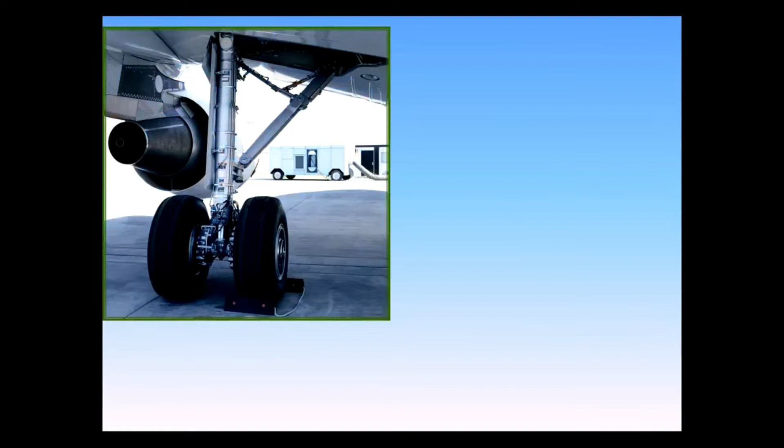The A320 is equipped with dual-wheel main gear which retract inboard, and a dual-wheel nose gear which retracts forward.

The wheels of the main landing gear are equipped with carbon brakes for efficient braking even at high temperature, an anti-skid system, and an automatic braking system. The nose gear is equipped with nose wheel steering.

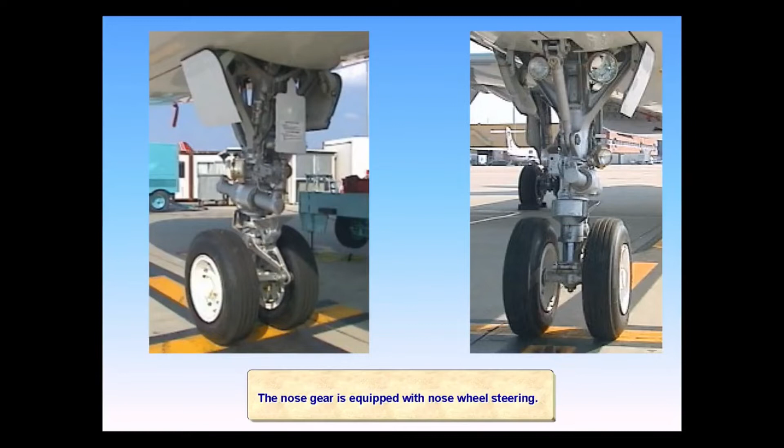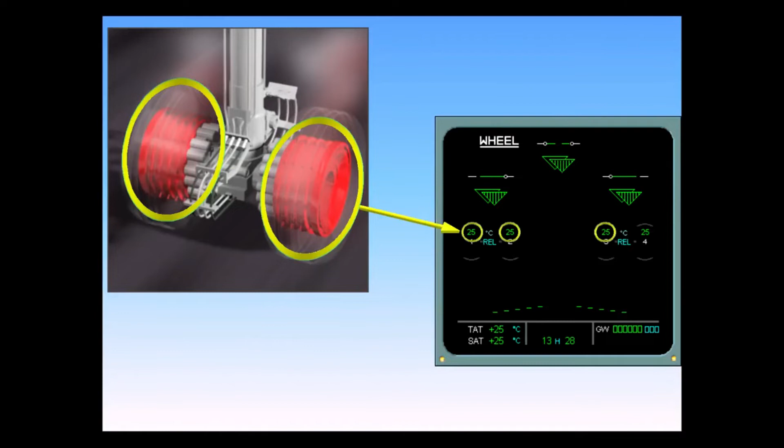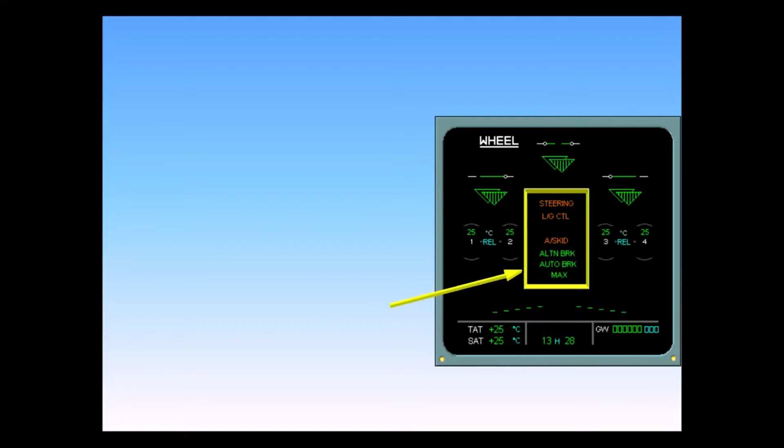The ECAM wheel page displays indications for the main landing gear, nose landing gear, landing gear doors, and brake temperature. In the center of the ECAM wheel page, green and amber messages can be displayed to provide normal and abnormal indications.

Since the wheel page is displayed during landing, spoiler position is also displayed at the bottom of the page for quick reference.

Let's go to the cockpit to locate the controls and indicators for the landing gear, brakes, and steering. The landing gear selector lever is located on the center instrument panel.

Just above the landing gear lever is located a panel which contains switches and indicators for the landing gear, the auto brake, and the anti-skid and nose wheel steering.

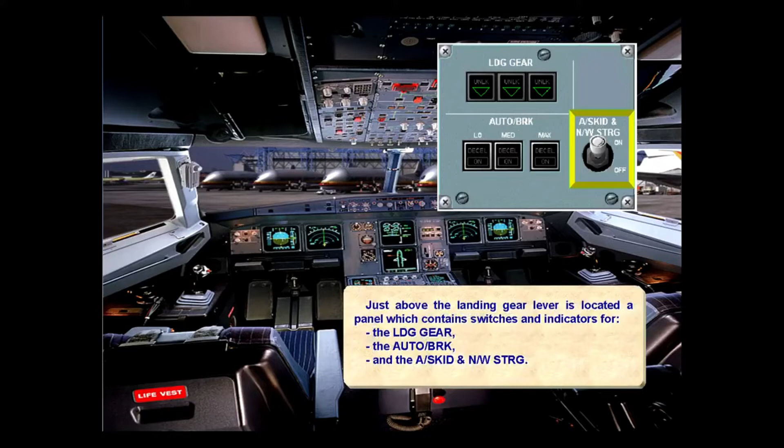Up, down, and unlock indications on the gear panel are associated with position indicators on the wheel page.

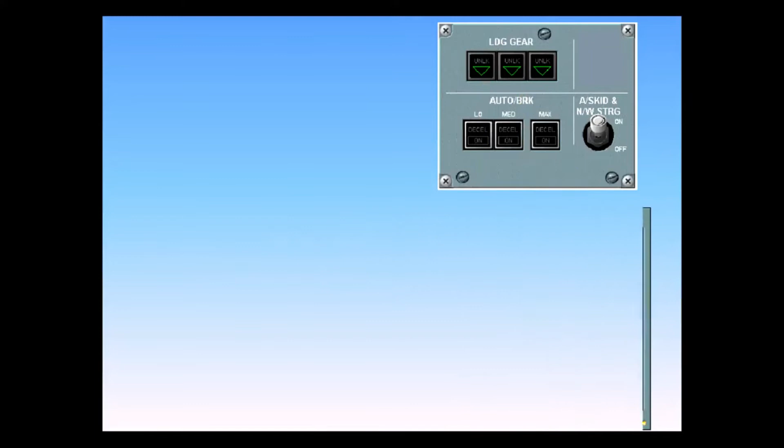When auto brakes are used, selection of low, medium, or max is made using these push-button switches.

This switch controls both the anti-skid and the nose wheel steering through the brake and steering control unit, the BSCU. Left in the on position for all normal operations, it is switched off only in case of specific malfunctions.

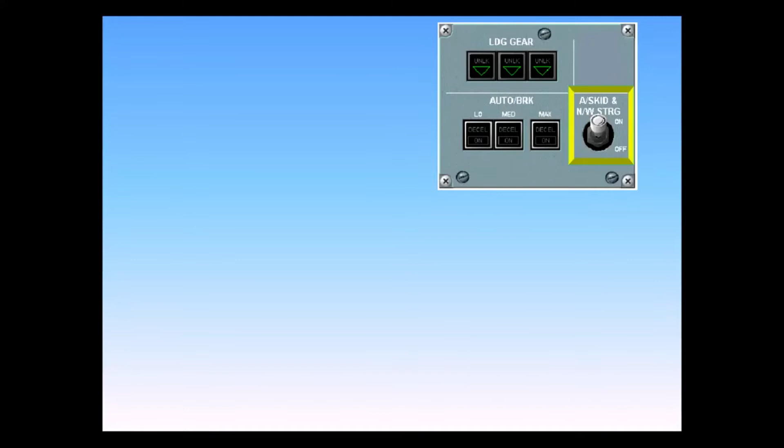The landing gear gravity extension handle is located on the center pedestal.

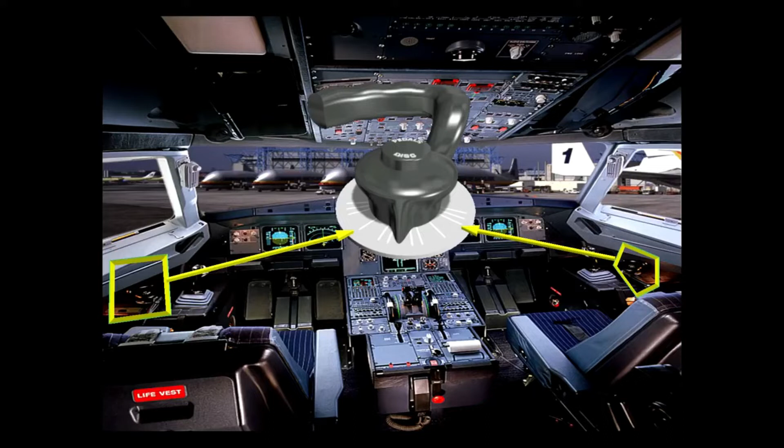The steering hand wheels are located on each side of the cockpit, so either pilot can taxi the aircraft. The rudder pedals can also be used to steer the aircraft. Note, United Airlines policy states that only the captain may taxi the aircraft using the hand wheel.

During taxi, either steering hand wheel can be used to control the direction of the aircraft. The steering hand wheel provides 75 degrees of nose wheel deflection, left or right. Signals from each hand wheel are summed up. If two hand wheels are moved in the same direction, the nose wheel deflection will be equivalent to the sum of the hand wheel commands.

During taxi, the flight controls must be checked. To check the rudder pedal, the disconnect switch must be held down. This button disconnects the nose wheel steering from the rudder so that full deflection of the rudder pedals can be checked against the indications on the ECAM flight controls page.

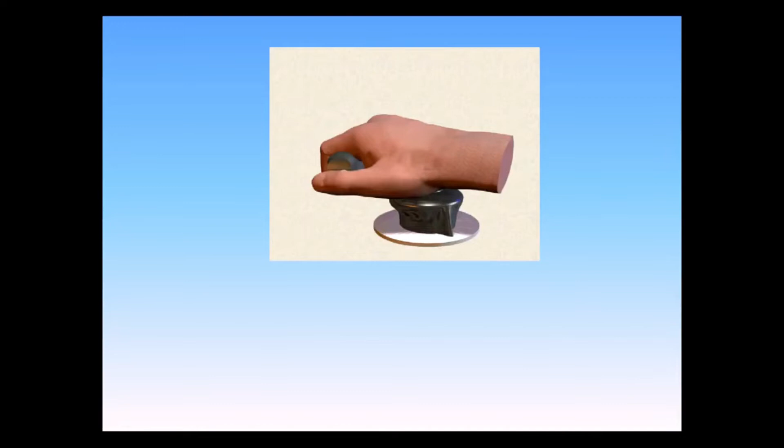During takeoff, the aircraft direction is controlled exclusively using the rudder pedals. The rudder pedals provide up to 6 degrees of right and left deflection at low speed. As the speed increases, this deflection angle decreases progressively until 130 knots, when directional control is 0% nose wheel and 100% rudder.

The rudder pedals are located on each side of the center pedestal. Manual braking is provided using the top of the rudder pedals. The parking brake handle is located on the center pedestal.

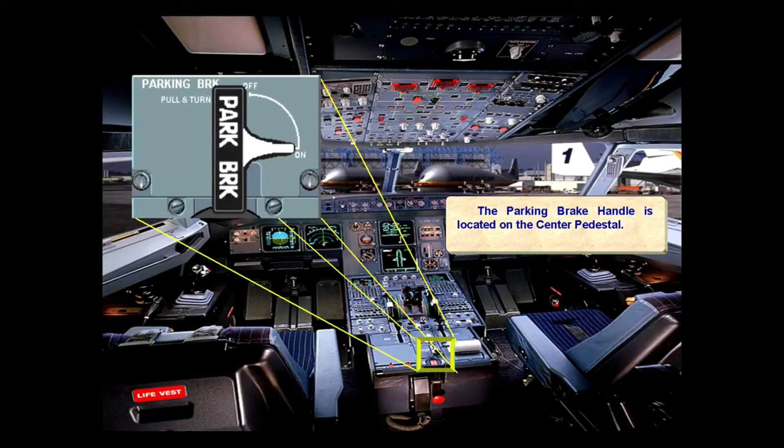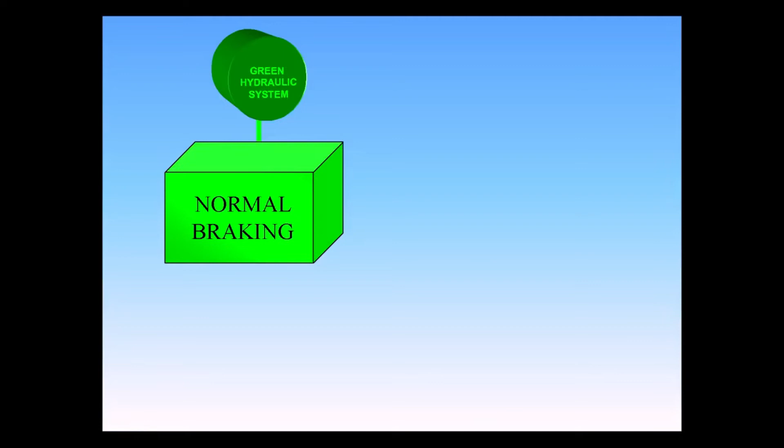The A319-320 provides two braking modes: normal braking, brake by wire; and alternate braking, conventional low-pressure hydraulic signal. Normal braking, which is powered by the green hydraulic system, utilizes electrical signals which are sent to the BSCU, Brake Steering Control Unit. The normal braking provides auto brakes, manual brakes, and anti-skid.

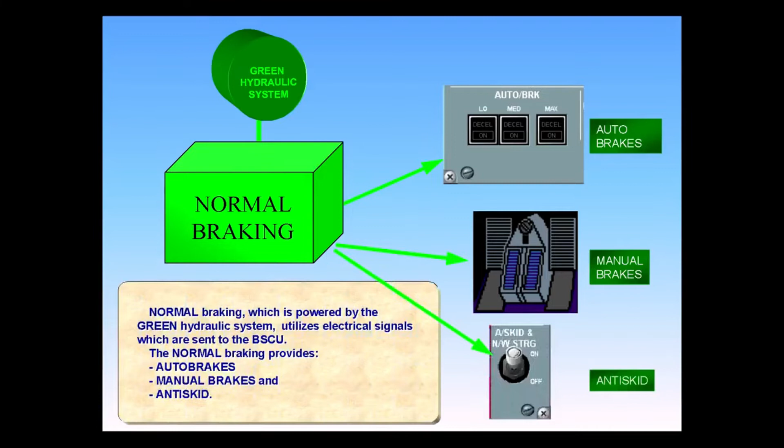Alternate braking is powered by the yellow hydraulic system. The alternate system is backed up by a hydraulic accumulator. The alternate braking provides anti-skid, depending on failure, parking brakes, and manual brakes.

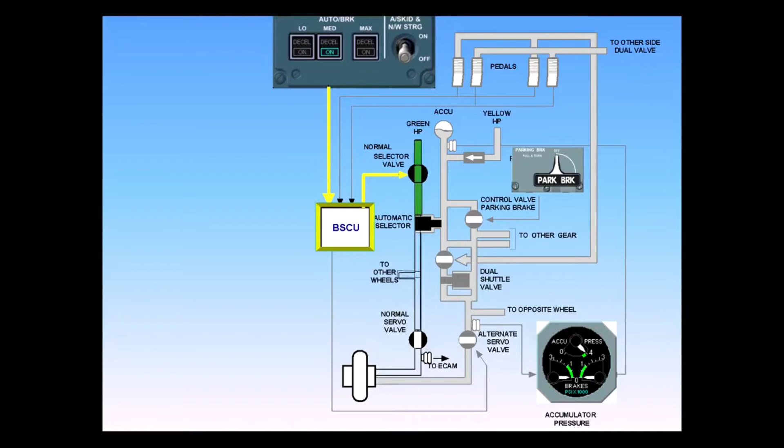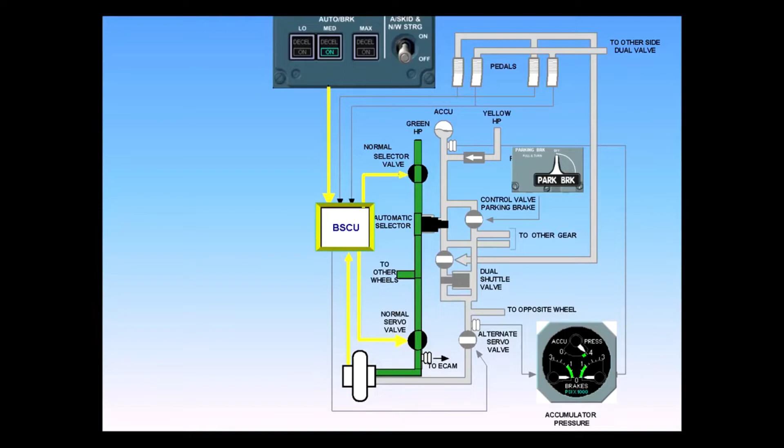If green brakes fail, or if the anti-skid and nose wheel steering switch is turned off, the yellow system takes over automatically. The normal selector valve closes. Yellow pressure pushes the automatic selector valve open, allowing hydraulic pressure into the alternate brake system.

The brake pedals send a low-pressure hydraulic signal to the dual valve. If anti-skid is available, the alternate servo valve modulates the pressure. When using alternate brakes, there is pressure indication on the triple gauge.

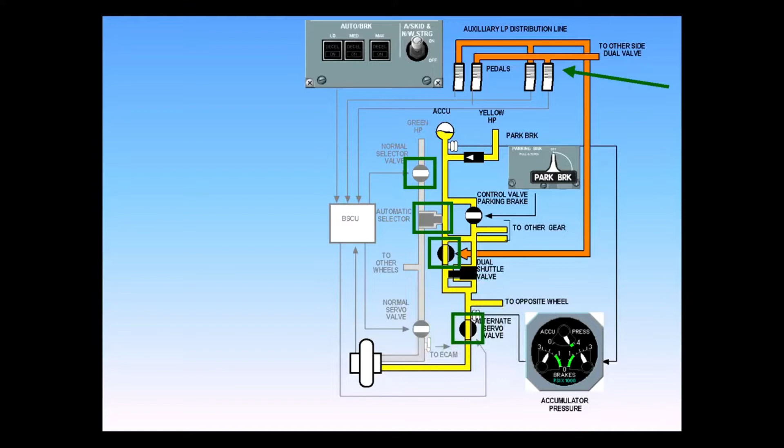If the failure has also caused the loss of anti-skid, the alternate servo valve will open fully. The pilots must monitor the hydraulic pressure on the gauges. Brake pressure must not exceed 1,000 psi.

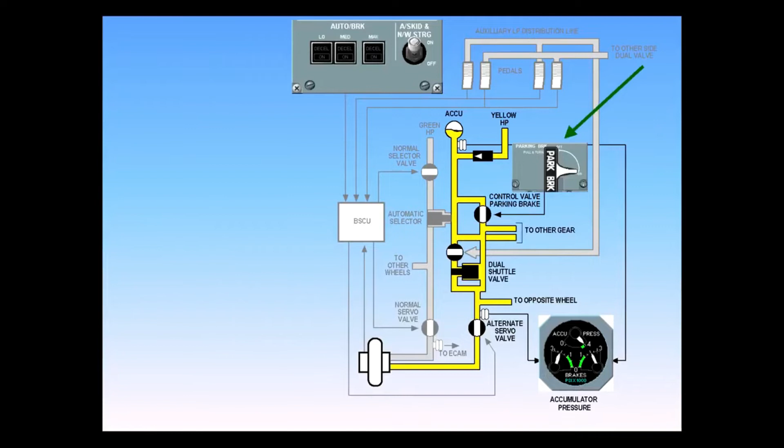The parking brake handle is located on the center pedestal. When activated, the control valve opens, allowing yellow hydraulic pressure from the pump or the accumulator to lock the brakes. All other braking systems are deactivated.

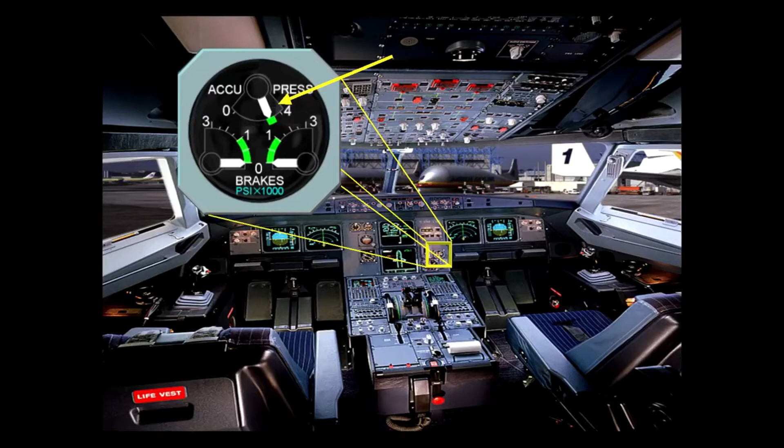This gauge, which is located on the main instrument panel, measures yellow system pressure only. The AccuPress, or accumulator pressure, will always register accumulator pressure as long as the aircraft is powered. The brakes gauges measure yellow pressure to the left and right wheels. When normal or green pressure is active, these gauges read 0.

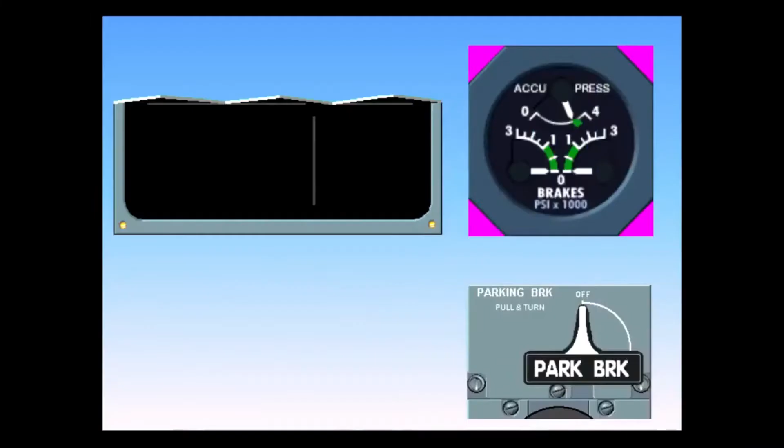The accumulator brake pressure is checked before setting the brakes. If the pressure is in the green area, the accumulator should be able to hold parking brake pressure for 12 hours. If the pressure indication is not in the green arc, use the yellow hydraulic electrical pump to recharge the brake accumulator.

When the park brakes are set, a green memo on the engine warning display appears. Notice that the pressure to the main brakes is indicated for each main landing gear. This is yellow hydraulic pressure. The park brake uses the alternate braking system, which is powered by yellow hydraulic pressure.

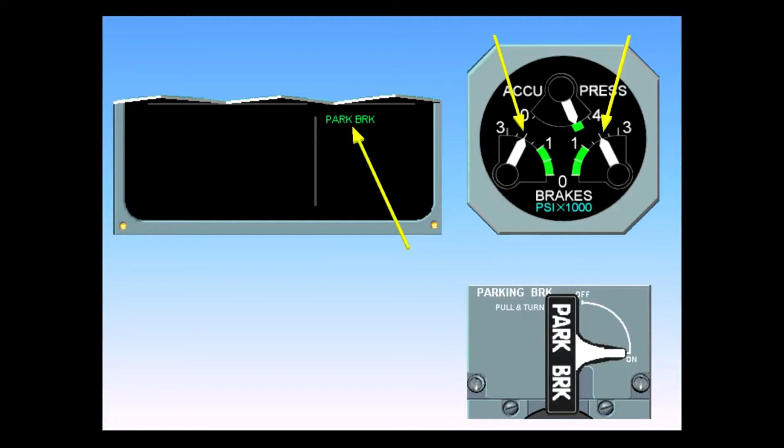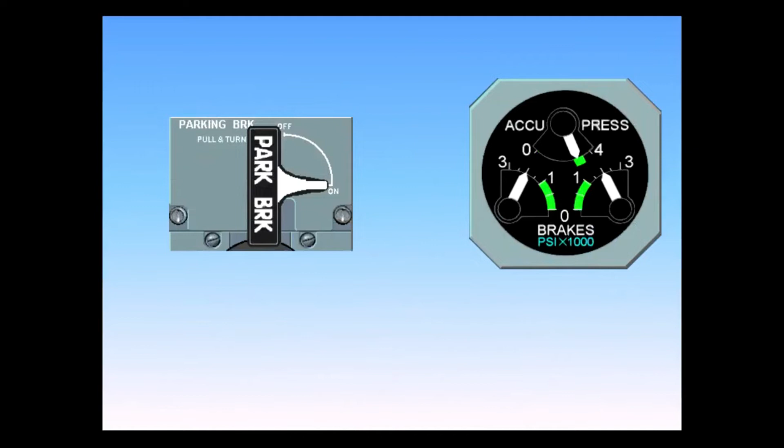Just before pushback, the parking brakes are released. Set the park brake to off. The park brake is off. Note that the two brake pressure indicators have dropped to 0.

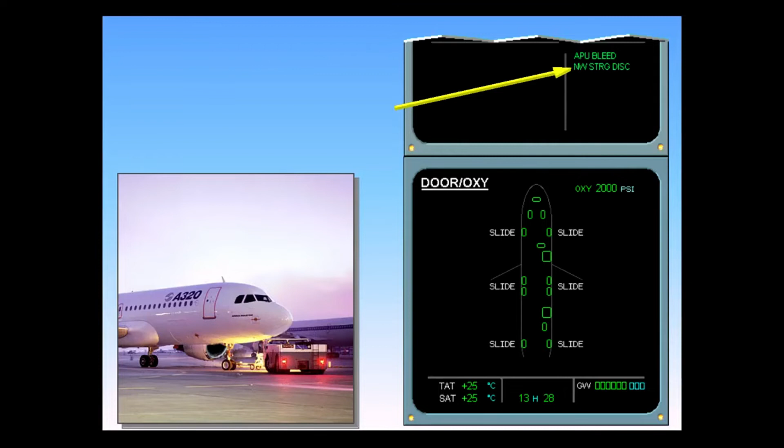During pushback, the nose wheel steering selector located on the nose wheel must be in the towing position. A memo, Nose Wheel Steering Disconnect, is displayed in green on the engine warning display, indicating that nose wheel steering is not available. The memo turns amber as soon as one engine is running, as a caution that taxi is possible, but that nose wheel steering is not available.

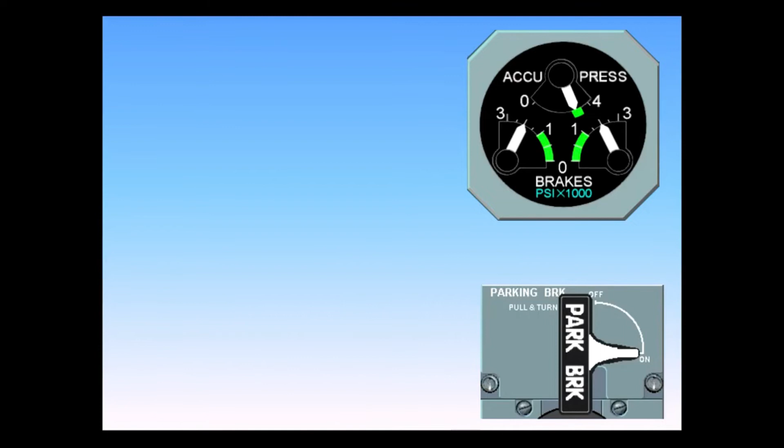The pushback is completed. With both engines running and nose wheel steering reconnected, the brakes are checked to verify that green normal brakes have taken over and that yellow pressure is at 0 on the brake pressure triple indicator. To initiate the test, hold the brakes down and turn off the parking brake.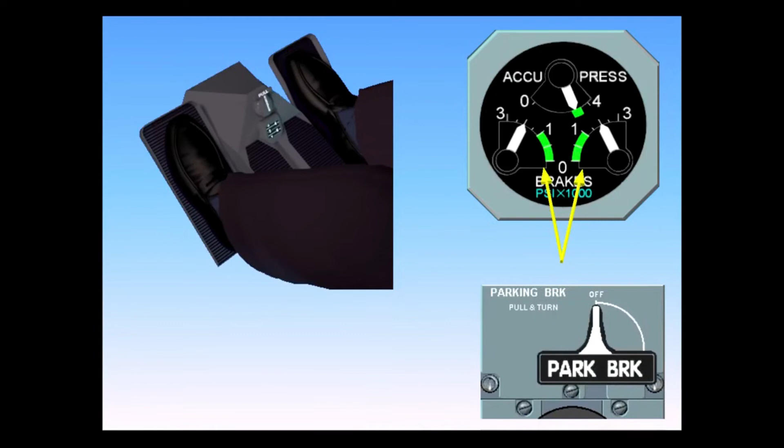On the brake pressure triple indicator, the brake pressure is at 0, indicating that the normal braking system is in use. Note, if brake pedals are quickly depressed, a brief brake pressure indication appears on the brake pressure triple indicator.

During taxi, the ECAM wheel page is automatically displayed.

Notice the two green triangles for each gear, indicating that the gear is down and locked. There are two computers called Landing Gear Control and Interface Units, LGCIUs, that provide gear indications and take turns controlling the gear. LGCIU 1 provides indications for the gear panel and for the ECAM wheel page. LGCIU 2 provides indications for the ECAM wheel page only. Its indications are the hash-marked triangles.

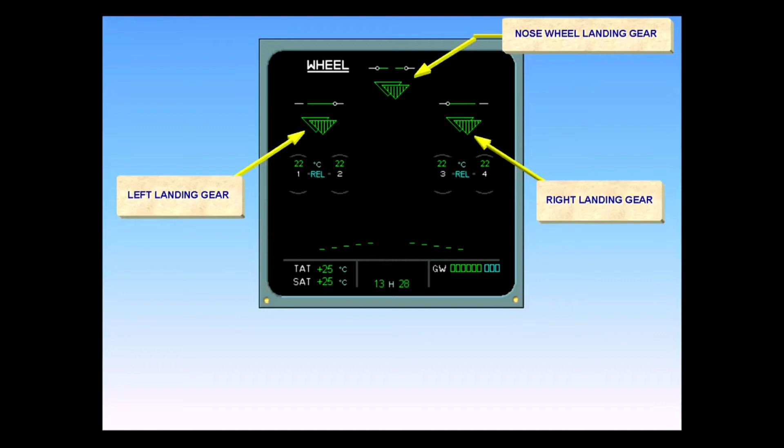The LGCIUs take turns with the gear operation. They switch over at each gear retraction or when one LGCIU becomes faulty. The green horizontal lines indicate that the gear doors are closed in the normal position.

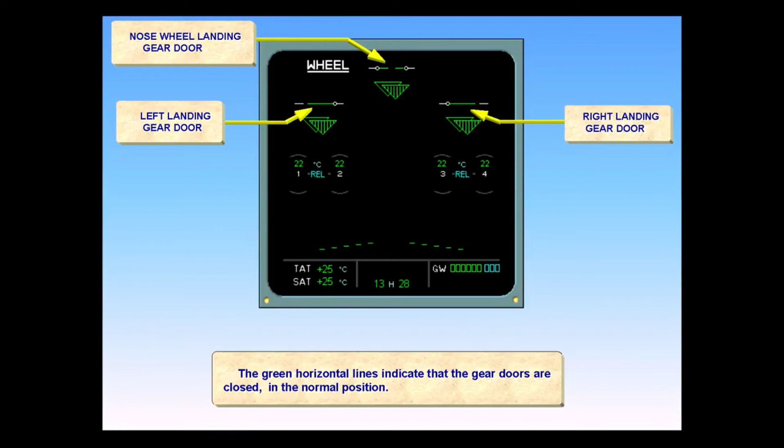Brake temperature is displayed in green to indicate that it is normal.

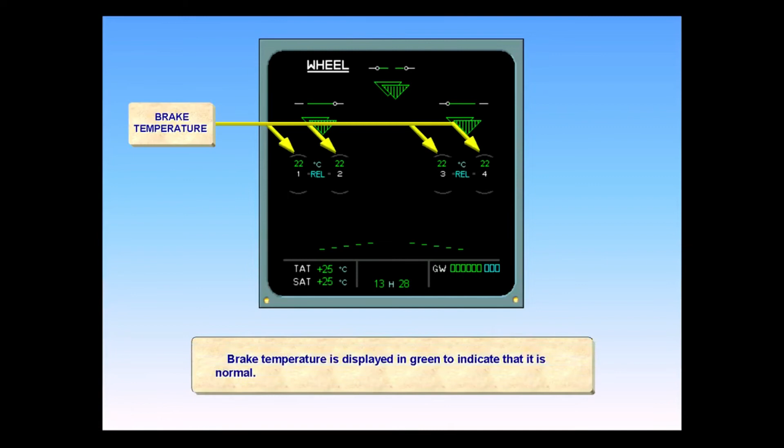During taxi, the auto brake is armed at max for takeoff. Set the auto brake to max.

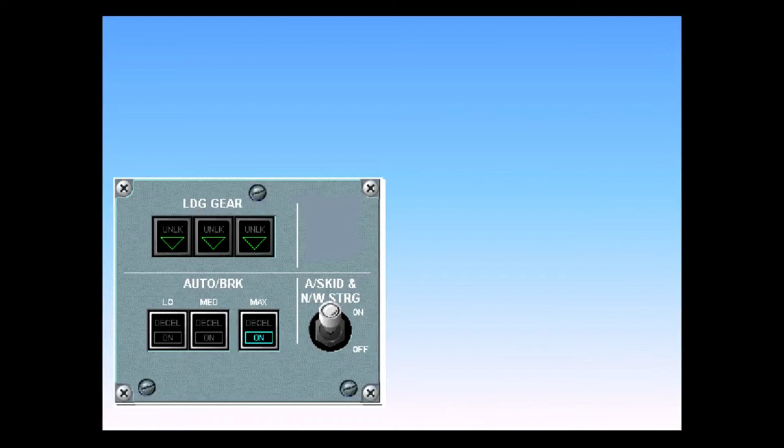The following indications show that the auto brake is armed: On in the selected push button, a message in green on the ECAM wheel page, and auto brake max changes from blue to green on the takeoff configuration message.

Normally, the ECAM engine page is displayed during takeoff. However, so that you can see the gear indications during gear retraction, we will display the ECAM wheel page. Retract the landing gear.

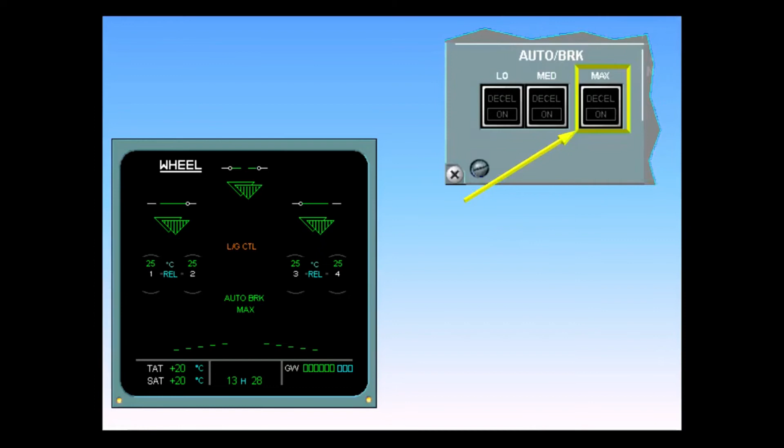Once the landing gear lever is in the up position, the auto brake is automatically disengaged. On disappears on the Max push-button switch, and Auto Brake Max disappears on the ECAM wheel page.

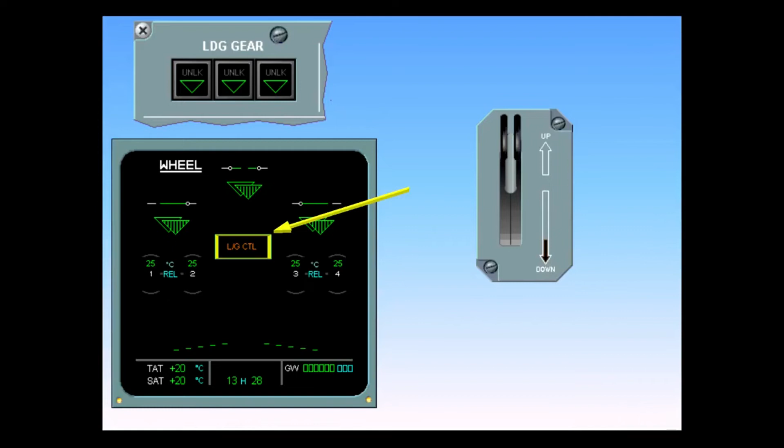Also, the message Landing Gear Control appears, indicating a discrepancy between the gear and the lever position. Watch the ECAM and the landing gear lights. We will point out the changes as they occur.

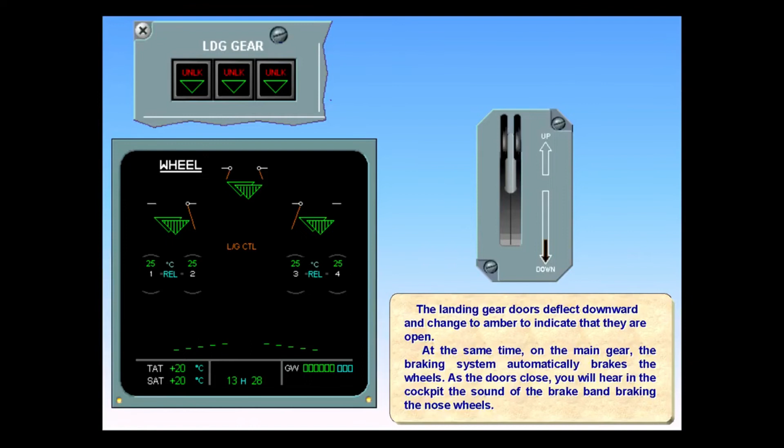The landing gear doors deflect downward and change to amber to indicate that they are open. At the same time, on the main gear, the braking system automatically brakes the wheels. As the doors close, you will hear in the cockpit the sound of the brake band braking the nose wheels. Then the landing gear retracts.

There are two sets of indications which inform the pilot that the landing gear is no longer locked. Red Unlock is illuminated in the position indicator lights, and the landing gear indicators become red on the ECAM wheel page.

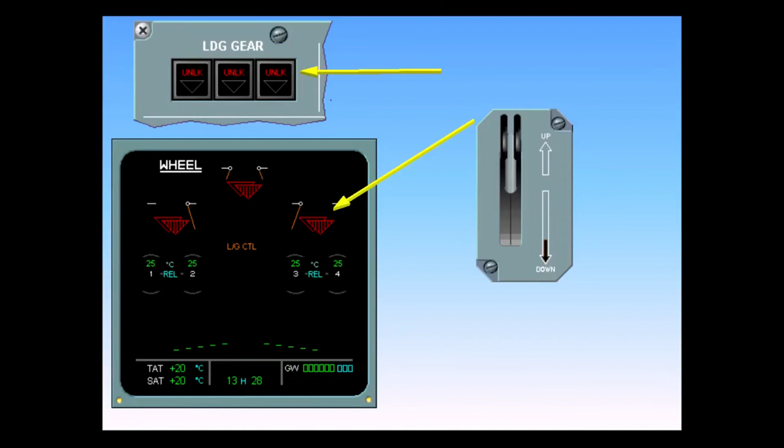On the ECAM wheel page, the gear is retracted and the doors close. On the landing gear panel, the unlocked indications extinguish.

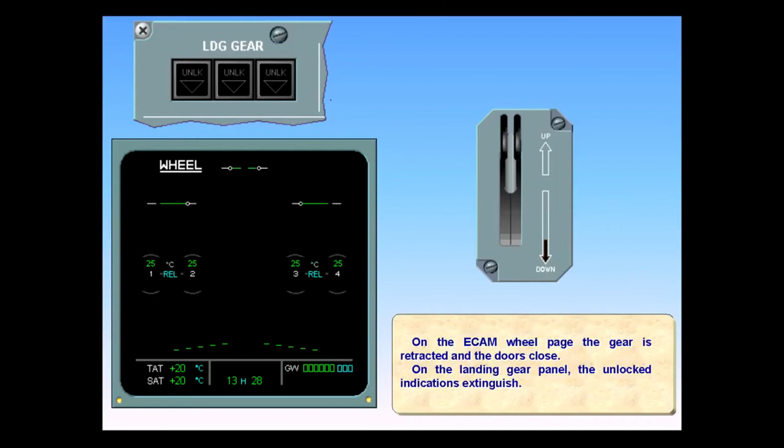Watch the indications as the gear extends. Extend the landing gear. As soon as the handle is down, the ECAM wheel page is automatically displayed.

On the ECAM wheel page, the landing gear door indications change from green to amber as the doors open. On the landing gear panel, the unlocked indications turn red to indicate that the gear is unlocked.

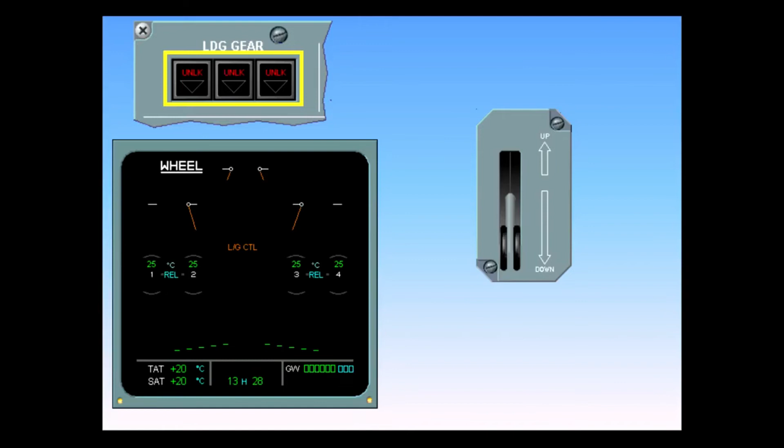The landing gear unlocks and descends. On the ECAM wheel page, the landing gear indications are displayed in red.

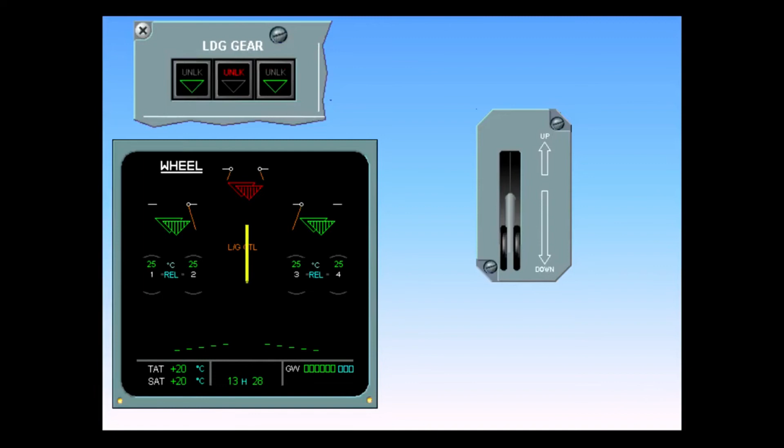The landing gear extends and locks down. On the ECAM wheel page, the landing gear indications change from red to green, and the door indications change from amber to green as the doors close. On the landing gear panel, the unlocked indications extinguish, and the landing gear indications become green to indicate that the gear is down and locked.

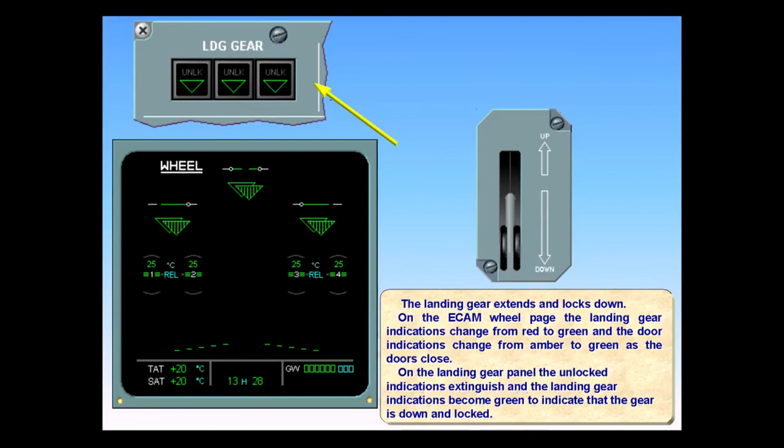These green dashes appear in flight when the landing gear is extended. They remain displayed until touchdown. They will come on and off during braking according to the anti-skid release order. They indicate that the anti-skid is normal and available. Note, the blue REL indication means released and is a label only.

The use of auto brakes is recommended when operating on contaminated runways or in low visibility. For landing today, we will use the auto brake. Set the auto brake to low.

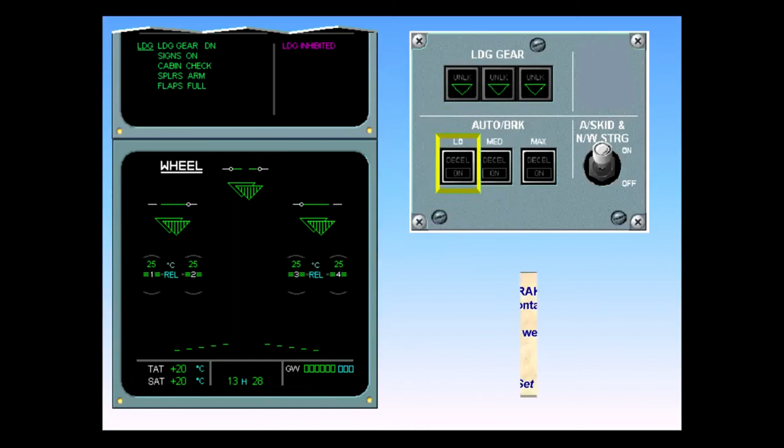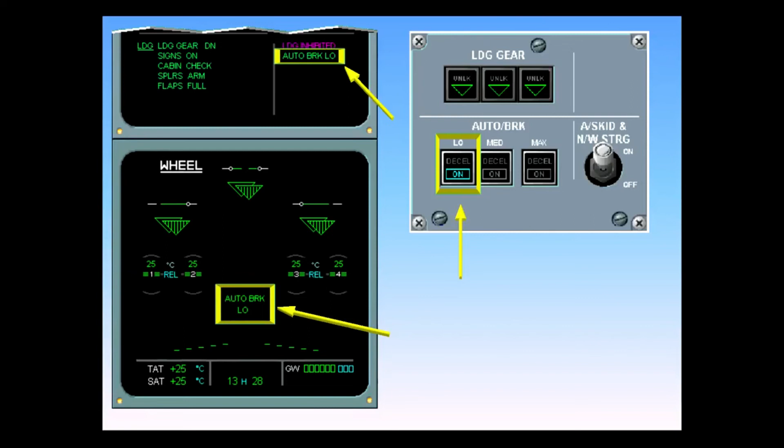The following indications show that the auto brake is armed: on in the selected push button, auto brake low in green on the engine warning display, and auto brake low in green on the ECAM wheel page. Note, on the EWD, the memo Auto Brake Low only appears below 800 feet AGL.

We have just touched down. During the landing rollout, extension of the ground spoilers triggers the auto brake. The deceleration light illuminates green when the aircraft deceleration is at least 80% of the selected rate.

Auto brake action depends on the rate selected. Low: braking after approximately 4 seconds. Medium: braking after approximately 2 seconds, and higher deceleration than in low. Max: immediate braking with max deceleration rate. This mode is only used for takeoff.

On the ECAM wheel page, watch the green dashes. They appear during braking, indicating that the anti-skid is active.

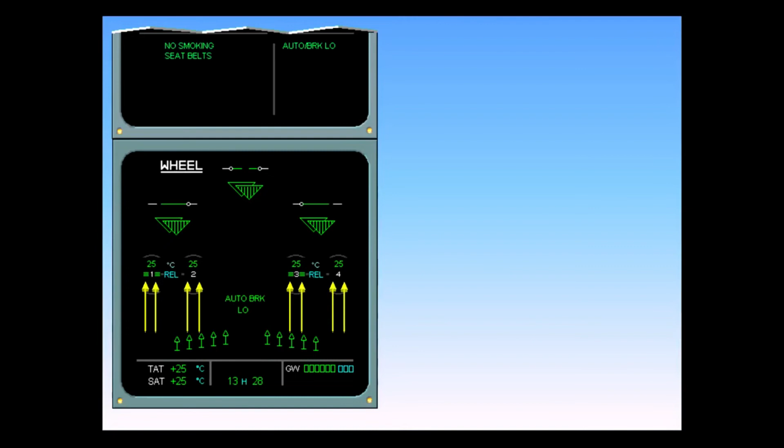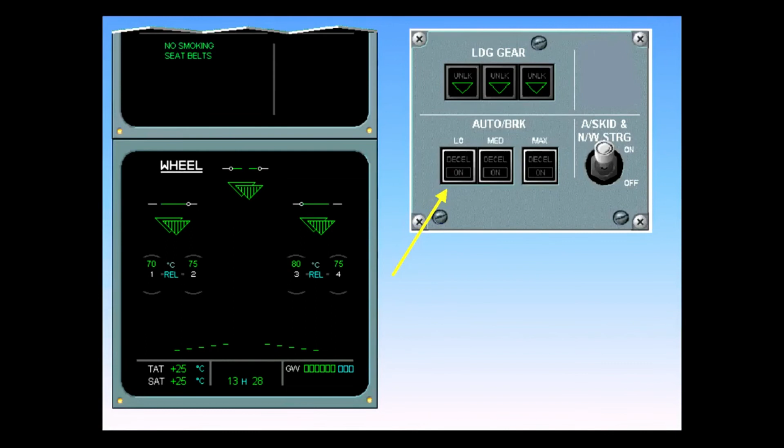The auto brake can be deselected, either using the corresponding push-button switch on the auto brake panel, or by applying sufficient force to one brake pedal in low and medium, and to both brake pedals in max.

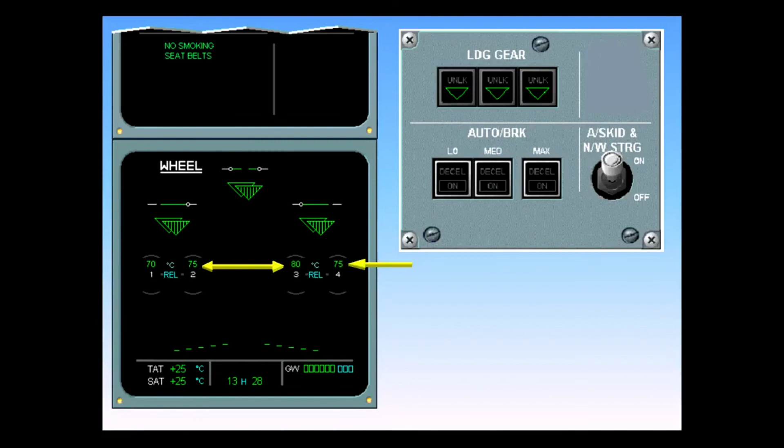On the ECAM wheel page, check the brake temperature for significant differences and high temperatures. Maintenance action is required if the temperature difference between two brakes on the same gear is greater than 150 degrees, and the temperature of any brake is above 600 degrees Celsius or below 60 degrees Celsius.

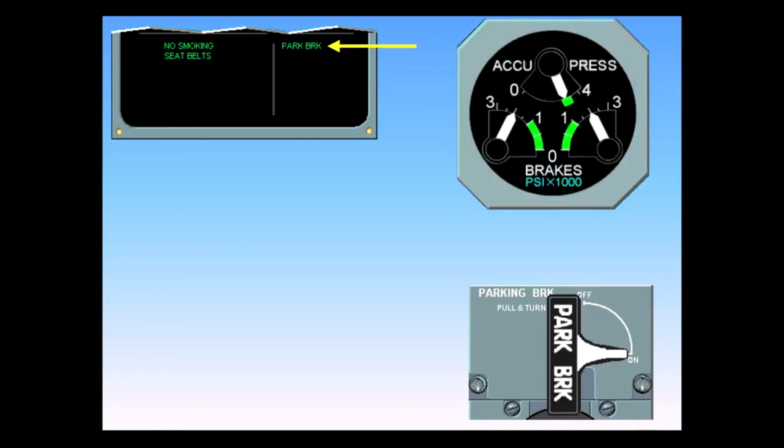Stopping at the gate, the first action is to set the parking brake on. The park brake is now set. Before releasing the pedals, check the brake pressure indications. Note, setting the parking brake automatically deactivates all other braking modes, any mode using the brake pedals.

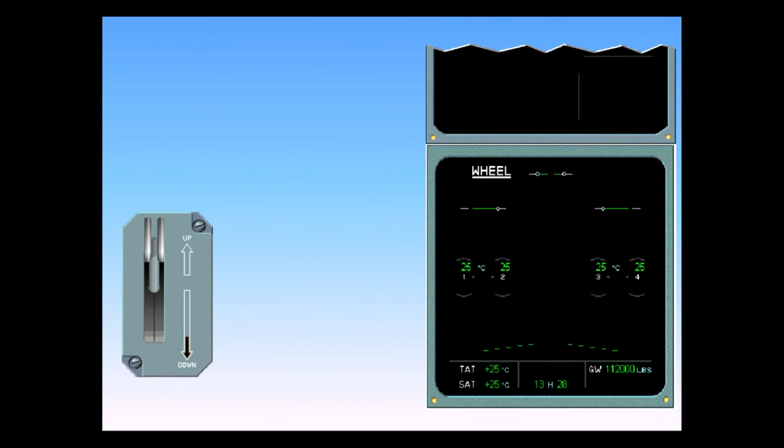This is a demonstration of a landing gear malfunction. Extend the landing gear.

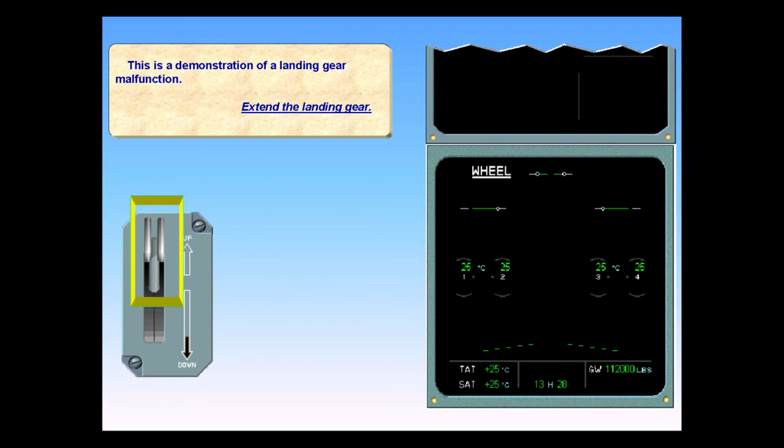Extinguish the master warning light.

The left main gear did not extend and lock. On the landing gear panel, the unlocked indication is red. On the ECAM wheel page, the message Landing Gear Control is displayed amber, indicating that the gear and landing gear lever positions disagree.

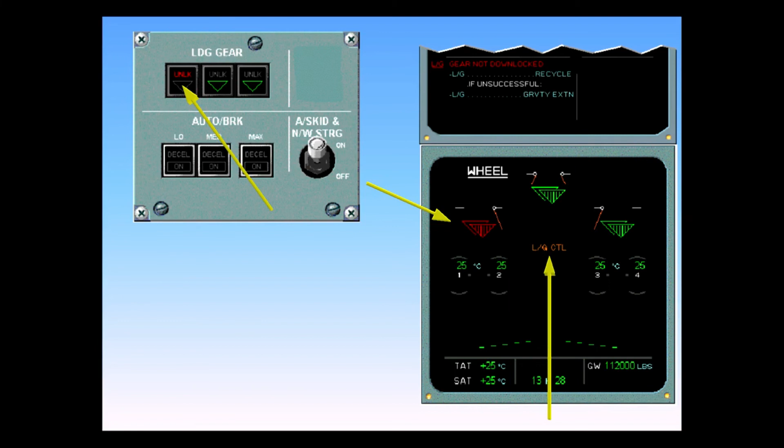The first step on ECAM is to recycle the landing gear. The crew recycles the gear. The landing gear is extended again, and the failure remains.

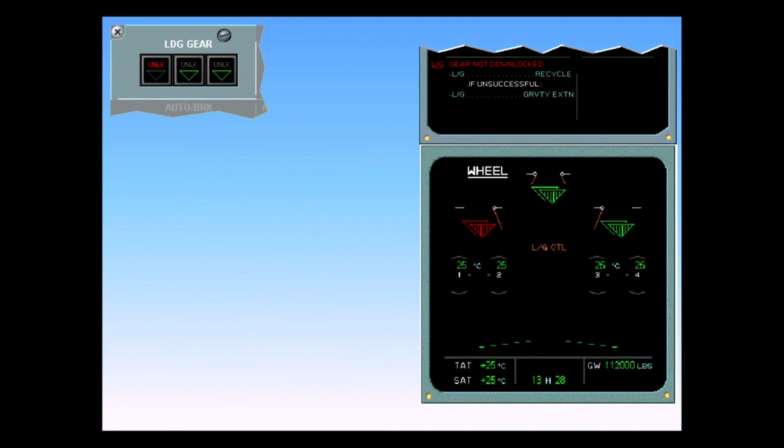The next action requires a non-ECAM procedure described in the flight manual. Extend the gear by clicking on the gravity extension handle.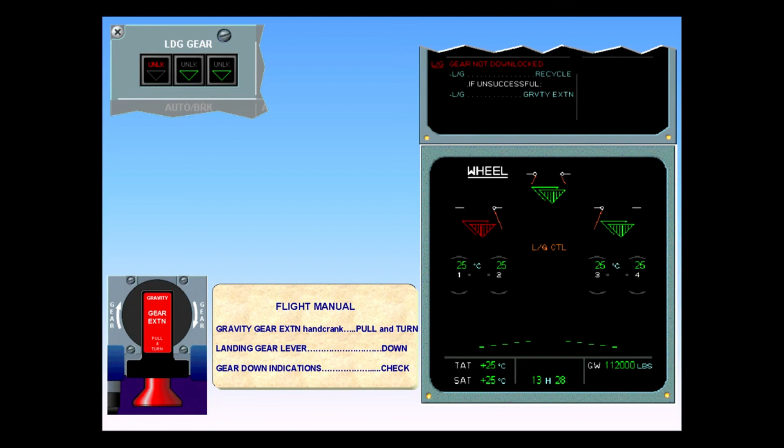The hand crank has been turned 3 times. The next step is to place the gear lever in the down position.

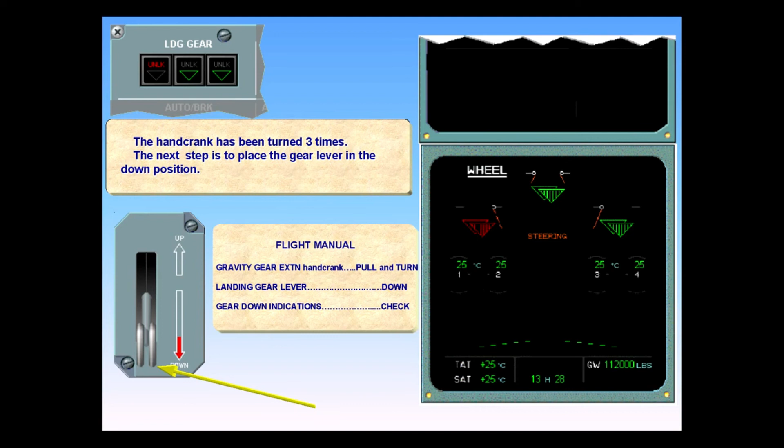Finally, check for gear down indications on the gear panel and on the ECAM wheel page. The gear is now down and locked. Note that the gear doors remain open.

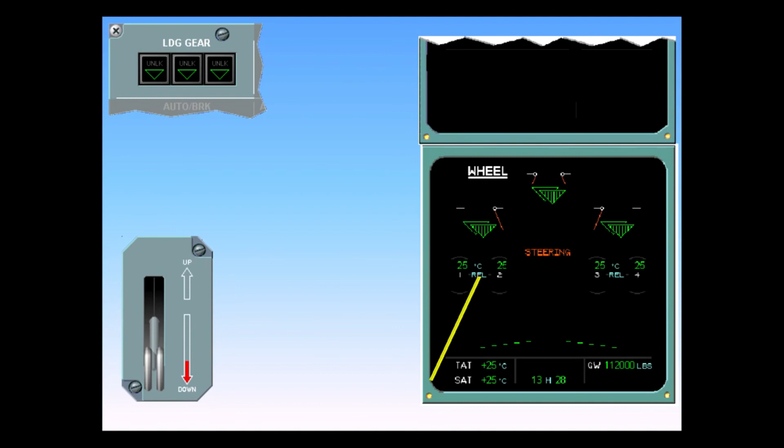This is shown on the wheels page. The door indicators are open and amber.

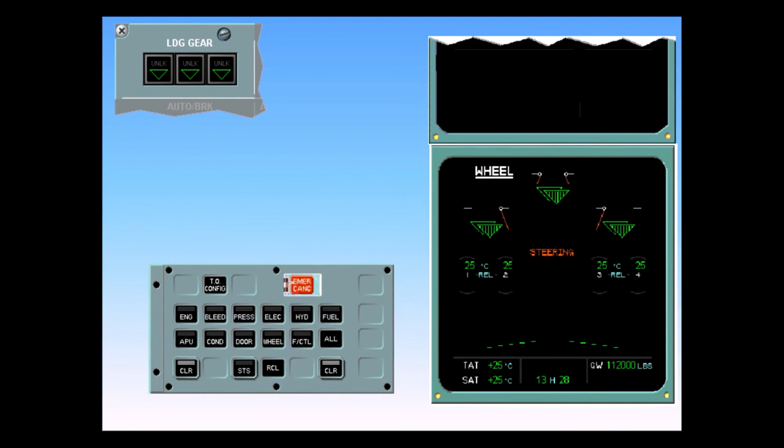The next step is to clear ECAM. Clear ECAM.

The status page is now displayed. Approach Cat 3 single only is listed in the left column, indicating a downgrade in approach capability. Cat 3 dual and nose wheel steering are listed under in-op systems. Anytime a landing is made with the gear doors open, nose wheel steering is lost.

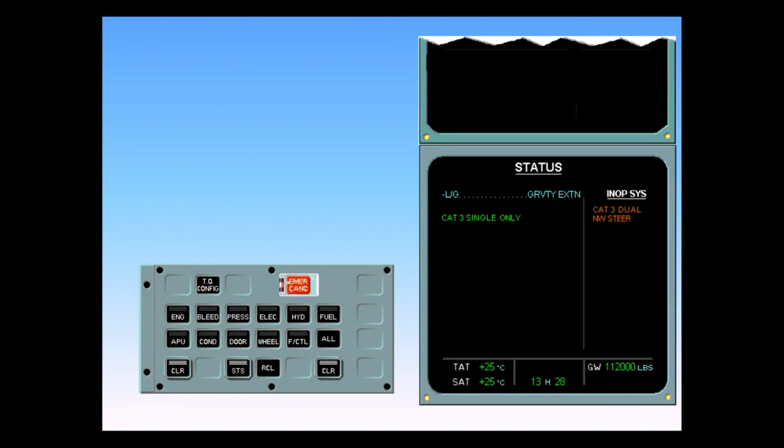The final step is to finish the ECAM procedure by clearing the status page. Clear ECAM.

ECAM complete. Screens normal. Notice that the status reminder is displayed on the engine warning display.

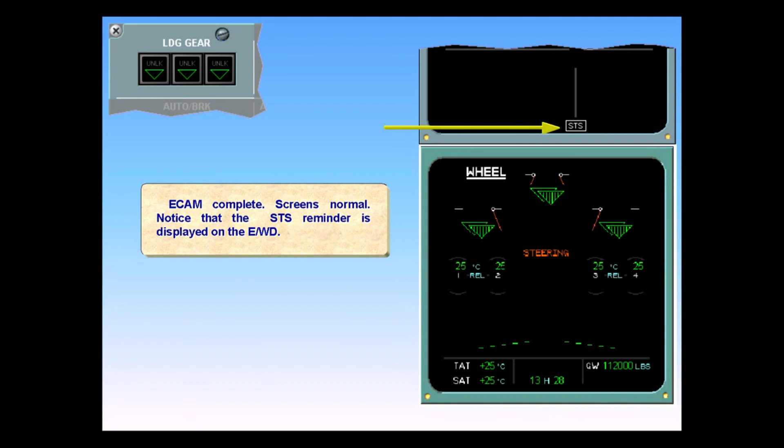Other ECAM faults will be displayed in the same manner. In this example, one LGCIU detects the nose landing gear in transit and displays the triangle in red. The other LGCIU detects the nose gear down and locked and shows a green triangle.

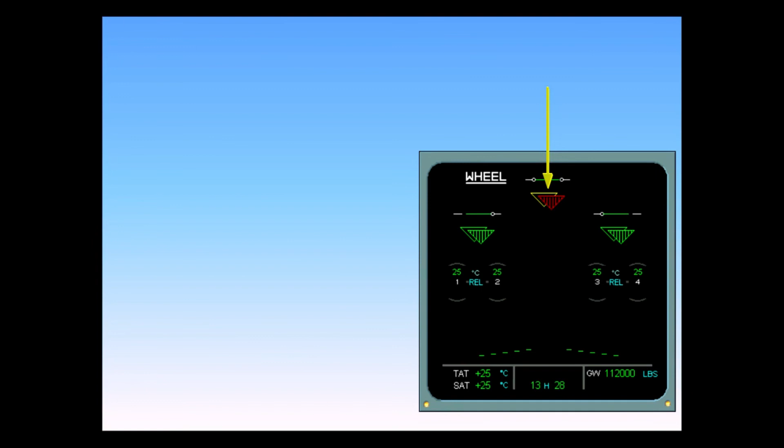In this example, one triangle is missing, meaning that the gear is detected up and locked by one LGCIU. The remaining triangle is red because the other LGCIU detects the gear in transit.

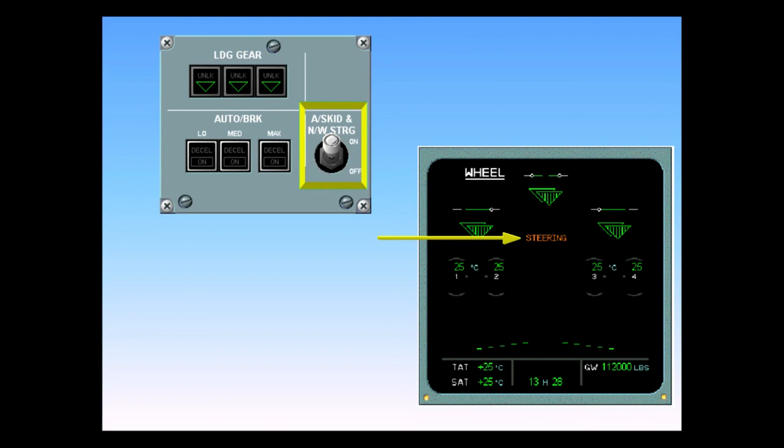The steering message appears in case of nose wheel steering failure, a green hydraulic system failure, or if the anti-skid nose wheel steering switch has been turned off. It is also associated with an ECAM caution.

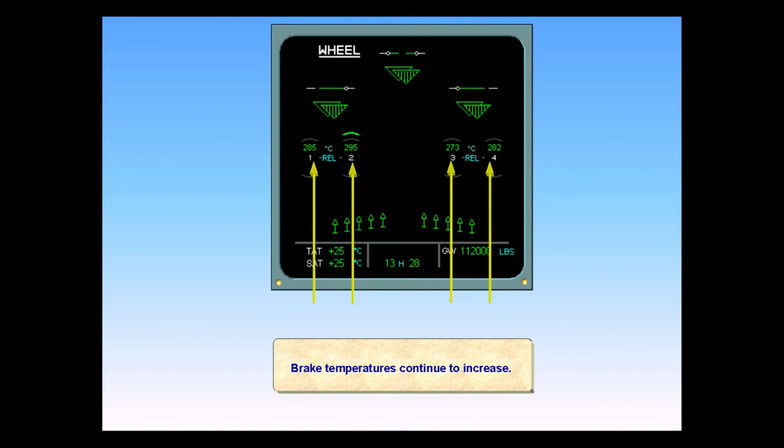Brake temperature continues to increase. You hear the chime and see the master caution. Extinguish the master caution.

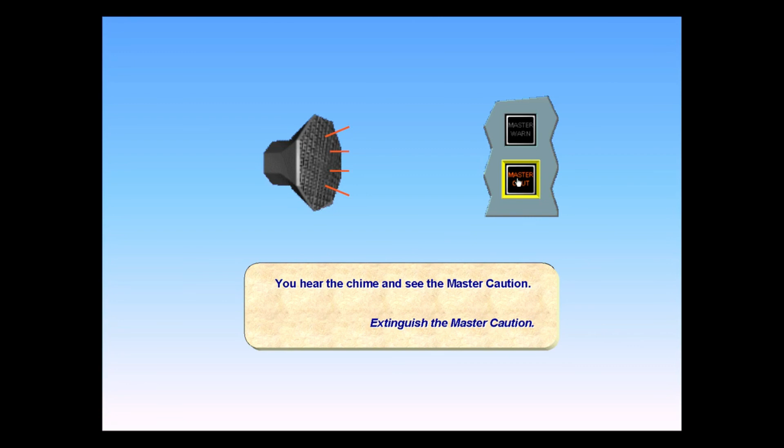The next failure will show automatic reversion to the alternate brakes. This failure can be caused by a green system hydraulic failure or by a dual BSCU failure.

The caution and associated checklist are displayed on the engine warning display. The green auto brake medium messages disappear from the engine warning display and from the wheel page. Auto braking is now lost.

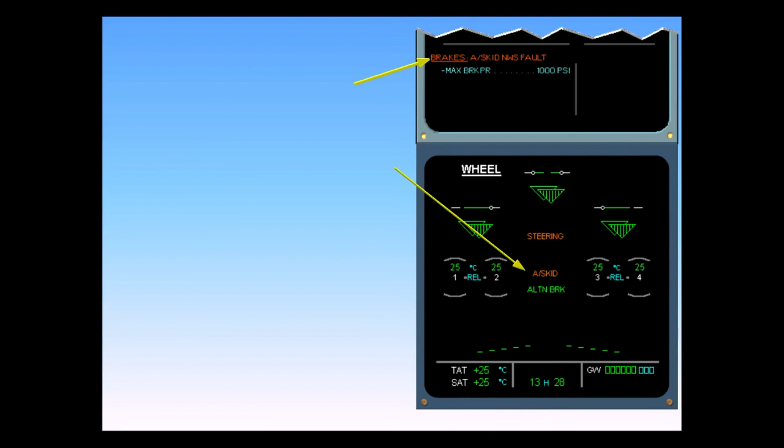On the ECAM wheel page, the message anti-skid appears in amber, indicating an anti-skid failure. Also, the message alternate brake appears in green, indicating the loss of normal braking.

When using brakes without anti-skid, care must be taken not to exceed 1000 psi on the yellow brake pressure gauge.